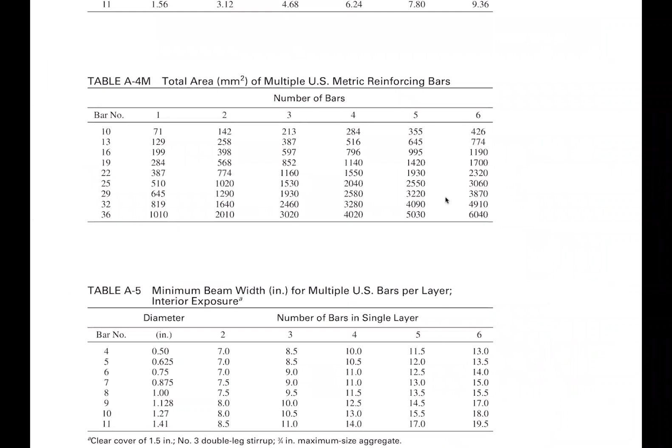Anything? A lot of work, no fun, just work, no play. Well, that sounds like my weekends, right? So that's why we're here.

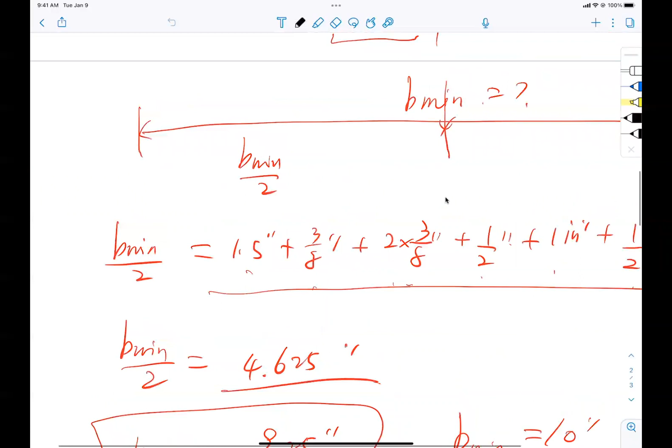What is what we learned here? What is this thing called? Read it out, please. B minimum. What does B minimum mean? Minimum width of the section that allows us to put so many bars in it. So that means if I tell you I am going to put so many bars into the section, you need to give me a size or dimension of the section, width of it, that can accommodate that many number of bars. So how do we write that? How do we get it?

We do that by calculating the detailing. We know that the concrete cover is 1.5 inch. So we go from the left side extreme, incrementally increase the spacing all the way to the corner bars, accommodating the clear spacing of 1 inch between the bars, and then add them up including the stirrup size, that gives you the B minimum. So that's everything you need to know about design.

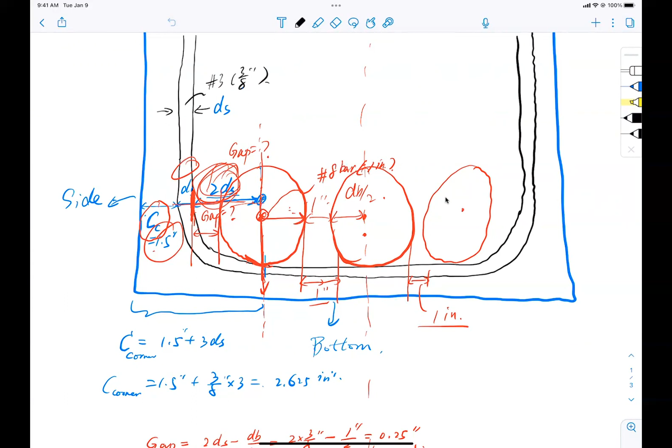But we're not finished yet. This is only one row of bars. Today we're going to look at 2 rows of bars. So bear with me, let's start the game. We have talked about 1 row of bars, it's wonderful. What if I have a section that looks like this, perfect square at the bottom?

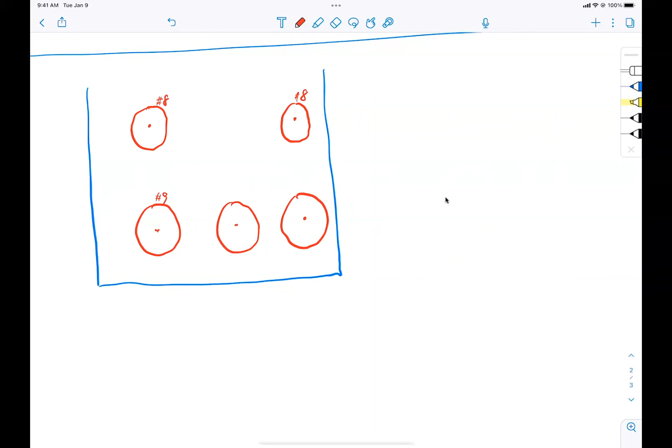And I have bars here, say 3 number 9 bars, 1, 2, 3. And I have 2 number 8 bars. Remember, it's on the side of it, don't put it in the middle. Why is that? Because we need to tie them up to the stirrups next to it. So number 9 at the bottom, number 8 on the top. This is what we have.

And then to put the stirrups here, I need to get this tangential line right up here. This is actually a little bit offset, but let me do this. Here I tangentially intersect, then come up here and do this. My drawing is horrible, but you can get the general idea. So this is the stirrups on the outside of it. Let's say the stirrups are number 3.

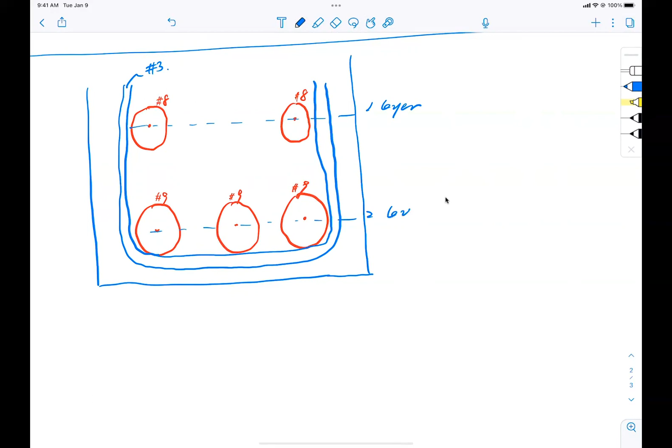Now what is the diameter for number 3 bars? 3/8, right, so 0.375 inch. Great. So now I have one layer of reinforcement right here, and I have a second layer of reinforcement at the bottom here. And if I say that I have a distance between the layers, that is clear spacing has to be 1 inch, you see this a lot. 1 inch is something I use a lot, clear space of 1 inch. The question is, what is the centroid of the group of the bars?

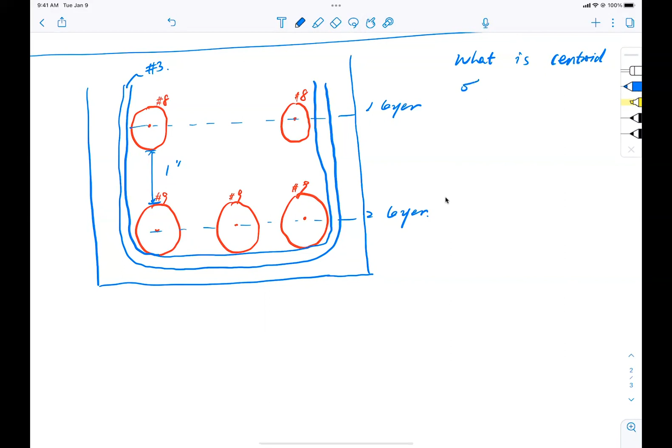What is the centroid of the group of bars? How do we calculate that? There is an equation, remember? What is that equation? Let me give you a hint.

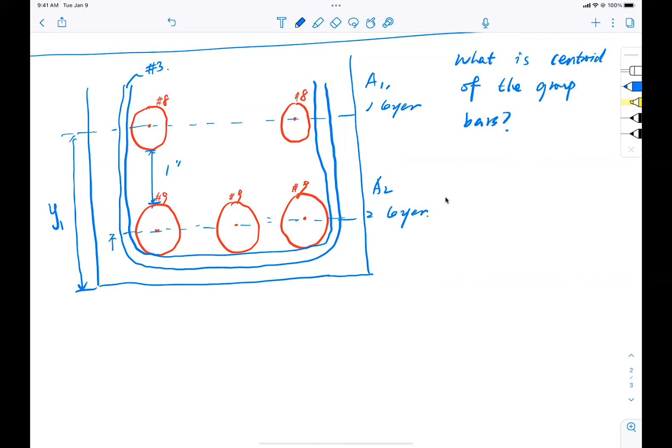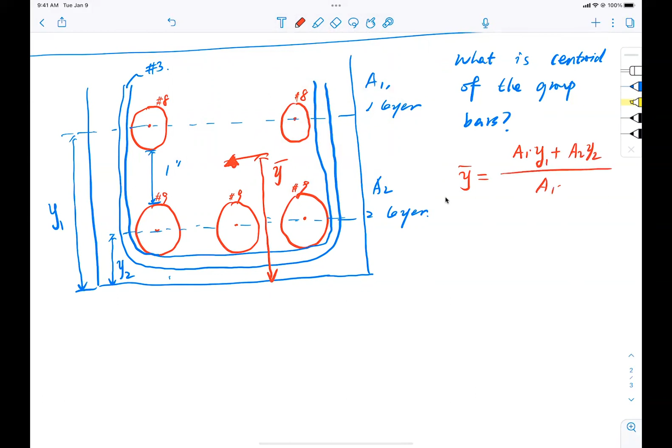So this is A1, and the distance between the centroid of the first row to the bottom line here, let's call it Y1. Now say I have a second row, A2, with distance Y2 from the bottom. What is the distance between the centroid of the group of bars to the bottom surface? Let's call it Y bar. So Y bar equals what? A1, Y1 plus A2, Y2, divided by A1 plus A2. That's very simple, right?

Now, what is the cross-section area for a single number 9 bar? 1 inch squared. What is the cross-section area for a number 8 bar? 0.79 inch squared, close. Okay, 0.79 inch squared. Wonderful. Now you have this information.

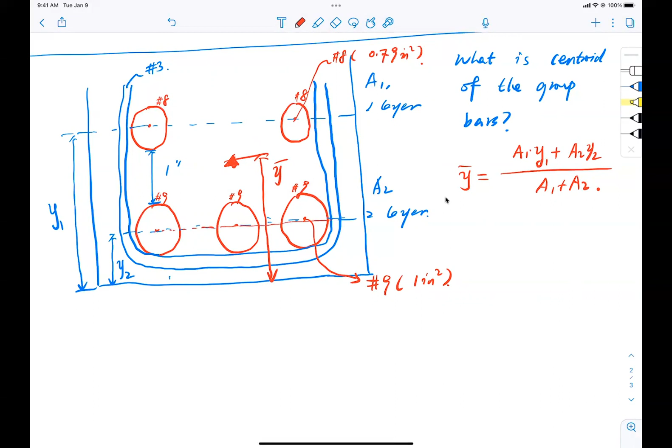Let's assume I have a distance between the centroid of the second row of bars, and that is Y2. Let's say Y2 equals 2.5 inches. And Y1 naturally equals 2.5 inches plus half the diameter of the number 9 bar, which is 9/8, multiplied by half, plus another clear spacing of 1 inch, plus another half of the diameter of the number 8 bar. What is the diameter of number 8 bars? 1 inch, divided by 2 is 0.5.

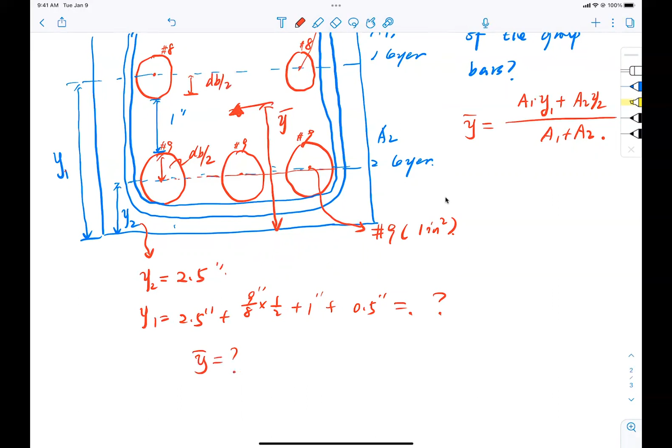Now you have all the information you need. Pull out your calculator, help me out here. Let's see what you get for Y bar. Can you do that? You have the equation, you have the parameters. I'm not going to let you sit there and listen to me yabba yabba on Monday morning. Pull out your calculator, use your brain, let's see what you get. And don't look at my old notes, I have different numbers there, I don't even remember what I have anymore.

New problem today, let's try it. 2 number 8 bars, 0.79 inch squared multiplied by 2, that's roughly 1.58 inch squared. And the distance is 2.5 plus 9/8 multiplied by half, something like that. So get this number.

Let me help you out. Let me do this first by hand while you work on your calculator. So this is 3, 4, so this is 9/16. So 4, 9/16, roughly equal to 4, 8/16 plus 1/16. So that's half, 4.5 plus 1/16. 1/16 is 0.06, something like that, so 4.56 rounded up inches.

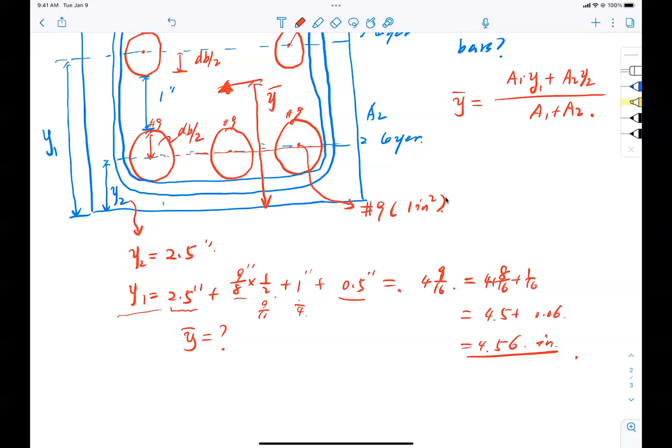No calculator - you guys say somewhere like that? Okay, to be precise, something like that. But anyway...

So that's Y1. You do your calculator, check me by hand. Y bar equals 4.56 inches - that's 2 number 8 bars, 1.58 inch squared, and this is inches plus 2.5 inches multiplied by 3, inches squared, divided by 4.58 inches squared.

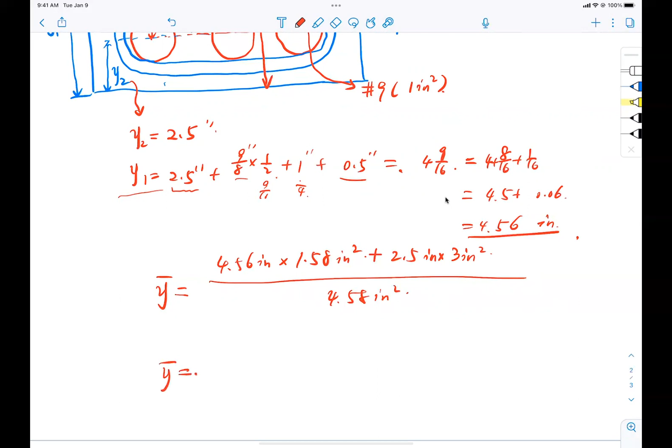What do you guys got? 3.21.

Do I get a second? Okay, so my hand calculation is not too bad, isn't it?

All right, so you got 3.21 inch. What does it mean? Anybody? Well, it means that the centroid of the group of bars to the bottom line here is 3.21 inch. Is that right?

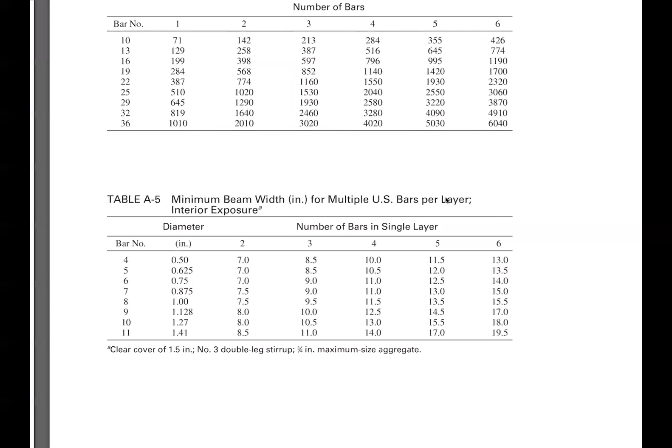Okay, what is the title for that? Read it out for me, please. Minimum beam width for multiple, yes?

Oh, I'm sorry, I had a question about this. Yeah, let's solve your question first. So in the notes, when we calculated DS in the past, it looks the same as when we calculate DT. Yeah, that is only when we have 1 layer of bars. Okay, so DS... Exactly, yeah. Okay, good, no problem.

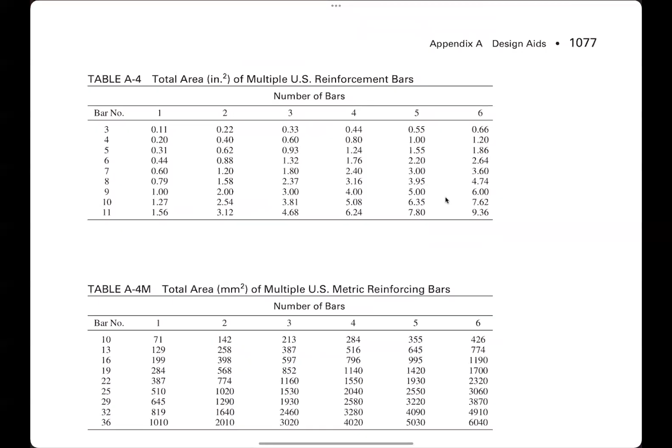Yeah, so let's get back to this. This is table A5, and it's called minimum beam width for multiple US bar per layer. So that means in our situation, I can choose my beam width from this table.

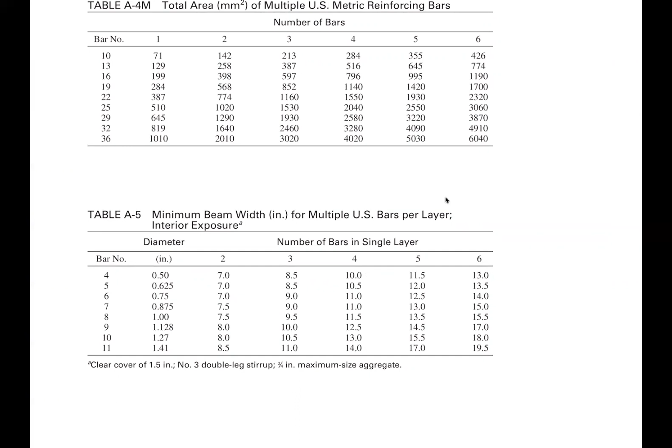Okay, how do I choose that? What kind of situation was I in? How many bars in the one layer? 3, number 9 bars. So I go to number 9, which is right here. Can you see that? Can you read it out for me? Number 9 bars, how many bars do I have there? 3 bars, right? What is the minimum beam width? 10 inch.

Okay, this is not precise, right? It's just a round number, so you can use this table for design. But in the exam, you cannot only use this one. In the exam, you have to do both ways: calculate the exact number and come back, check table A5 to see if you have a similar number or not. But there is a shortcut, there's a shortcut.

I think with this, we're done with this spacing details. Are we okay with this? Are we okay with this? Yeah, like different numbers of bars and different layers affect how close our value is to that.

Well, think of it, right? You have 2 layers of bars in this scenario. If I say these 2 layers, which layer do you think will be the controlling layer? Why? It yields first. And also why? It has more bars as well, right? It needs to accommodate more bars, right?

So, very good question. In a scenario where I have multiple layers of bars, pick the layer that has the most number of bars. Use that layer to dictate your minimum beam width. Okay, clear? Good. All right, so are we okay with this now? Are we happy with this? Any question about it? No? Okay, we'll come back to talk about it.

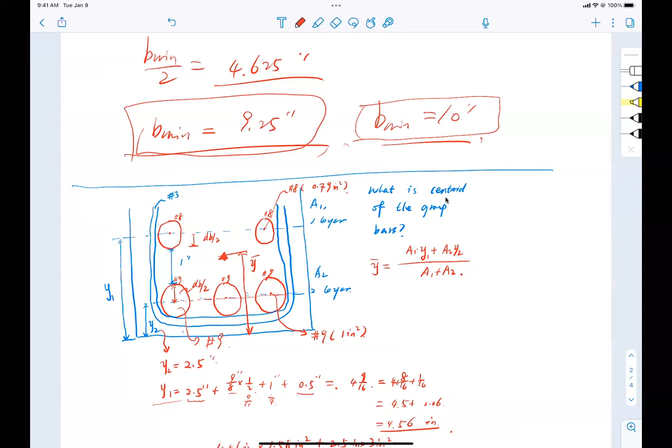All right, so at this point we're done with beam width calculation. Two things you learn, right? What are the beam width calculations? One, we know how deep the bars are relative to the bottom surface of the concrete. We know how to do that with multiple bars. We now also know how much beam width you need to accommodate so many bars in it.

So now we are truly ready for design. Okay. So you may ask me, Bob, we did design already, right? Last time we did a computation. We give you a section, tell you what kind of bars you need to use, and you ask me how to calculate it, right?

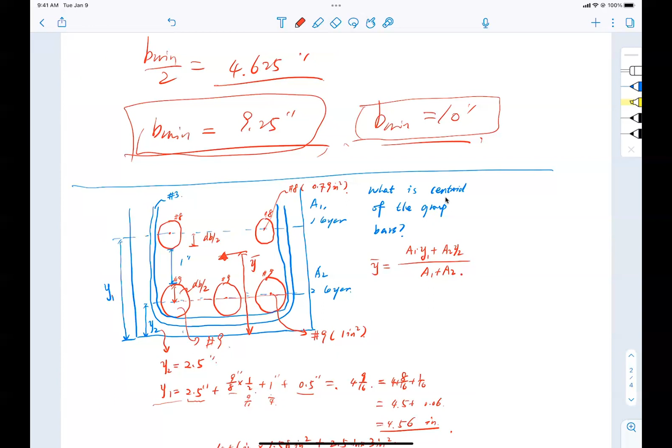Sure, you did, but that was not a formal process. Today we're going to talk about the formal process of doing design. So new lecture, lecture 6. Let's talk about design. Design.

All right, so lecture 6, design, be careful here. First thing, design for a singly reinforced section. This is design part 1.

Let's take something very easy. This is only unknown reinforcement, but known section size. That means I'll tell you the section size. For example, I have a section like this, and I give you a width of it. So let's say B equals 12 inch. And then I have a height of it, H equals 24 inch.

And I'll ask you, what is my reinforcement needed? This is so-called design for unknown reinforcement. So how do you start? Or rather, is this question complete? Can you start with this information only? Can you just start design right now?

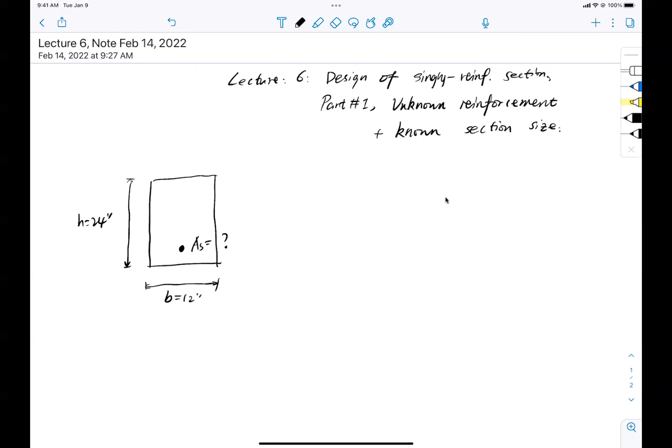Can you start right now? It's like you're a contractor, you go out there on the job site, I give you a $1 million building, build me a house. They say hell no, I'm not gonna sign for that. What do we need? Say it again. Concrete type. So F prime C, say for example in KSI. What else?

You don't ask, I don't tell. Then you're in trouble. Ask me, what do you need? Strength requirement, what is that? MU or N? Think again. MU, factored moment. Close, very good. Factor moment. All right, I'll tell you that, but wait a minute.

What else do I need? You're designing it, you're building it, you're building the project. What do you need? We got concrete, right? What else? This is reinforced concrete design. You got concrete, what else? Steel, right? What do you need for steel? Grade, right? Grade 60, there you go.

What else do you need? What else do you need? And that is all, this is pretty much it. So you see, you need this information to start your design.

All right, now what about MU? How do we determine MU? Let me tell you how. So I am putting this beam in a simply supported fashion on a MODOT I-94 bridge nearby Winsburg. I'm telling you that I have a dead load on top of it, and I have a live load on top of it. So, MU equals what?

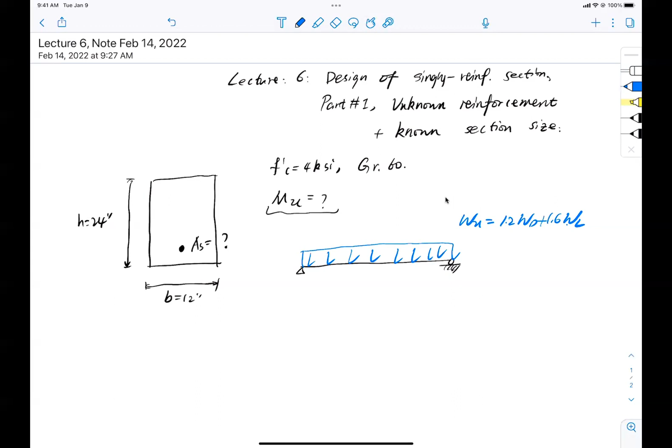I say look, you guys are pretty smart, I'm not going to play games about it, I'm just going to tell you. The moment diagram looks like a parabola, right? And the maximum moment is at the middle of it, right? Let's just say the span length of the beam is L.

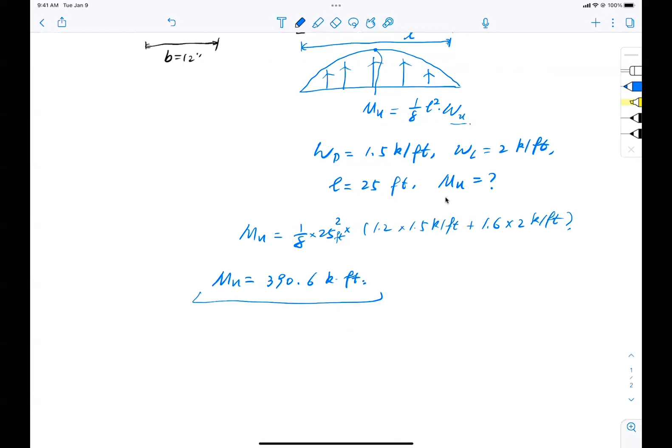You also good, okay. So say this is what we get, right? This is what we get. Okay, now with this I'm going to ask you to design the section for it. So where do we start?

You have Mu now, right? So I'm going to start my design process. Design. And how do I design it? How do I start? Calculate phi, right? How do I calculate phi?

From where? Phi Mn. Phi Mn equal to, I know, phi Mn equal to what? Bigger or smaller than Mu? Sure, before we go there, phi Mn bigger or smaller than Mu? Smaller than Mu?

Oh boy, we're in trouble, right? The design has to exceed the required, right? So phi Mn has to be bigger than Mu. Okay, but should we start with phi? Why do we start with phi?

Say again, we know beta 1. How do we know beta 1? That's right. So beta 1 is what here specifically? 0.85, right? And what else? What else? Anybody? Anyone?

Actually, I would say I don't know where to start. Too many leads, right? It's like a crime scene. Too many suspects. I have phi, I have Mn, I have beta 1, I have A, I have B, I have everything, right? Where do we start? Okay, where do we start?

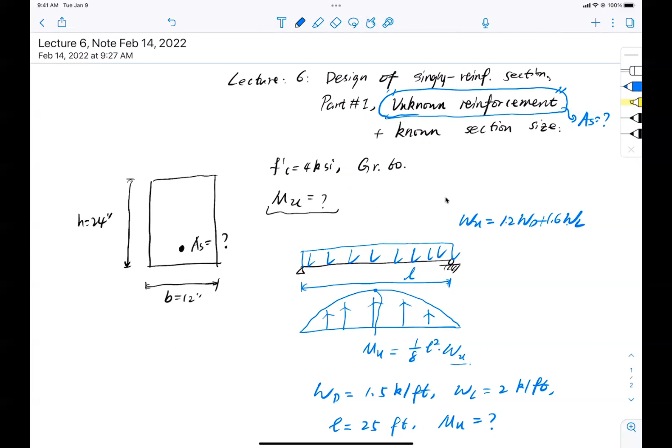Because what is the equation for Mn? Remember, Mn equal to what? T, tension, right? What is tension? As, what, Fy, yes. And then bracket inside, ds minus what? A over 2.

Remember this equation, right? What did we say about ds? For one layer of bars assumed, one layer of bars, what is ds? H minus concrete cover. What is the concrete cover here? 2.5 inch. So we know, isn't it? We know, isn't it, right?

So now what is unknown here? That is what? That is what? A is unknown here, is that right? A is unknown here. So I look at this equation and I say, look, how about let's just assume the A. Can I do that?

First, go find out how much reinforcement area I have. I have reinforcement area, I have total tension. I go back to balance the compression, then confirm A. So I start from A, and it resolves back to A. So that is my thought process, that's how I start.

Okay, with this I can now finally start. Let's keep a bracket here for this digression and thought. Okay, let's start doing it. From this equation, AS times Fy times ds minus half A, that equals Mn, and that multiplied by phi has to be greater than or equal to Mu. So AS has to be greater than or equal to Mu divided by phi Fy ds minus half A. That's how I'm going to start.

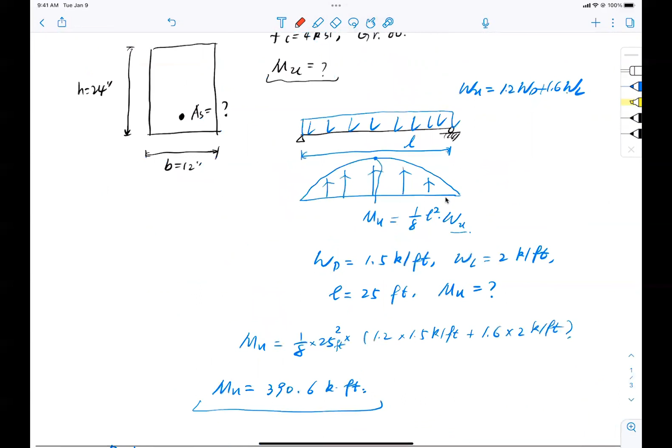So with that assumption, let's just assume this is 0.9 multiplied by ds. What is ds? H, what is the height of it? What is the height of the section? Somebody remember? 24. 24 minus what? 2.5. There you go, help me out here please. So that is how I'm going to do that.

Can I go straight into calculation right now? I can't, there's a unit mismatch. On top what I have is kips, foot. On the bottom what I have is kips, inch, right? So I need to convert everything back to inch. Multiply by 12 inch per foot to convert it. Now everything's in terms of KSI inch, or kips inch, right?

Now please help me out, do this calculation. What do you end up with? What is this number right here? Come on, do it. You won't find it in the notes, okay? The notes have something totally different. I had it totally different in the notes. Okay, come on, help me out here. 390, it's pretty big.

12 inch per foot, 0.9, 60 KSI, so on, so blah blah. What do you have? 4 point what? 4.49 inch, 4.49 inch squared.

Good, so let's say roughly 4.5 inch squared. So given this number, how many bars? Let's say number 9 bar, okay? I want number 9, simple-minded, pretty simple guy here. Number 9 bars only, how many bars do I need to cover this? 5. What is the beam width here?

B, 12, right? Question: can I fit 5, number 9 bars into this width? Can I do that? I don't know, isn't it? I don't know, I've got to run the detailed calculation, remember? And that's going to take forever, right? So we take the shortcut.

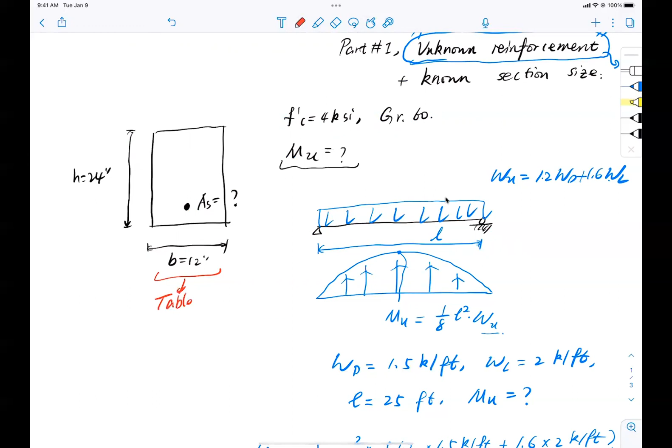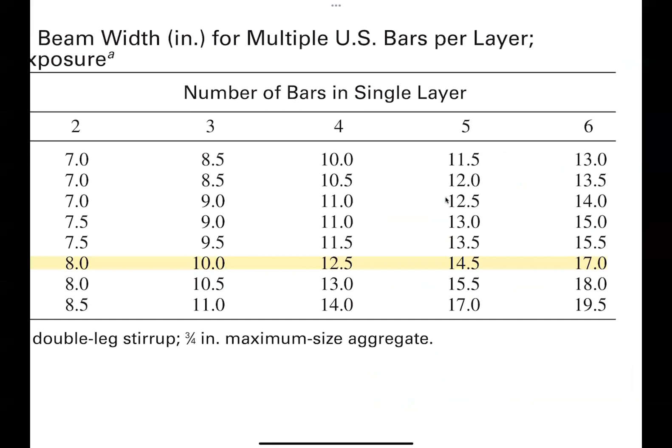What is the shortcut? Table A5. There you go, Table A5. So let's take a look, right? Table A5, so I go back to Table A5. Where is it? Here, and I look, right? Help me out, 5, number 9 bars. What is the minimum beam width?

14.5 inch. What does it mean? Means that I cannot design this section to resist this 391 kip-foot with number 9 bars. I have to either increase my bar size or increase my section, isn't it? I increase my section. So that's a check already. Do you see that?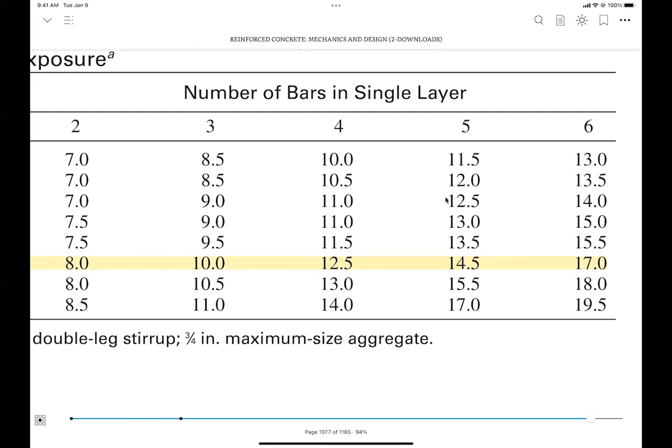Okay, wonderful. All right. But I'm lazy and I want to finish this lecture in reasonable time, okay? So let's keep playing along and reduce the Mu here. I'm not going to design a section for this capacity, too big. Let's play a safer game. Let's say, okay, start all over. And now you can look at old lecture notes, right? Start over. Let's say Mu equal to 145 kip-foot.

Very small number. Why is that? Because I'm lazy. I want to keep using the 12-inch by 24-inch section. I want to keep using number 9 bars. I'll show you later how we can design for a higher capacity, but today let's go with small capacity first.

I just want to show you there's a pre-check. You know right away whether this design will work or not. It takes you only 5 minutes on the job site. You know immediately whether this section size is big enough for your beam or not. Get it? So don't rush into it. Go there, do a quick check, so you know immediately whether this section can work or not.

All right, so apparently it doesn't work. So I'm going to reduce my load and give you an easier problem. I say Mu equal to this much, and let's recompute. So now AS, forget about it, drink your beer and forget about it, right? Say AS equal to 145 kip-foot multiplied by 12 inch per foot, converting to kip-inch, and then come back here.

0.9, 60 KSI, and 0.9, a 21.5 inch of depth. Okay, you run this number. I'm going to speed up since this is repeating. So this has to be 1.67 inch squared. Now you look at this number, 1.67 inch squared.

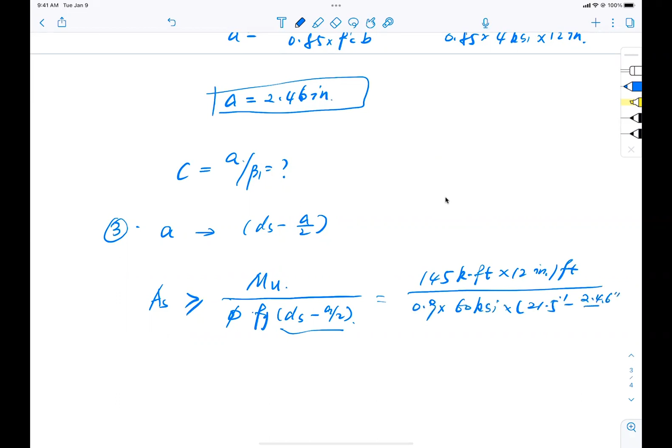So now AS, recalculate my reinforcement, needs to be greater than Mu divided by 0.9, which is phi Fy, and now I know my depth minus half A because A is known. So first step, I need to confirm this. So this is 145 kip-foot multiplied by 12 inch per foot, divided by phi, still 0.9, 60 KSI multiplied by ds, which is 21.5 inch minus A now calculated 2.46 inch divided by 2. And with this, my AS has changed to 1.59 inch squared.

Okay, so what did we do? We guessed the As, used that As to go back and check A, then used that A to go back and check As again. So after iteration 1, we finalize As now. At this point, we say now you can select bars.

So how do we select the bars? 1.59 inch square, right? Can I do this? Sure, you can do that. So I have options now. I can use number 9 bars. Remember number 9 bars, and 2 number 9 bars gives me an As of what? 2 inch squared. That covers that 1.59 inch squared requirement.

But I can also opt for number 8 bars. To do number 8 bars, how many bars do I need? 2 or 3? With 2, I end up with 1.58, just a hair less, right? So I need 3 number 8 bars. So what is the cross-section area for number 8 bars?

0.79 inches. So 3 number 8 bars, how much? 0.79 multiplied by 3, come on, what do you get? 2.37 inch squared. Do I get the same? That is bigger than 1.59 inch squared. So I either go with 2 number 9 or 3 number 8.

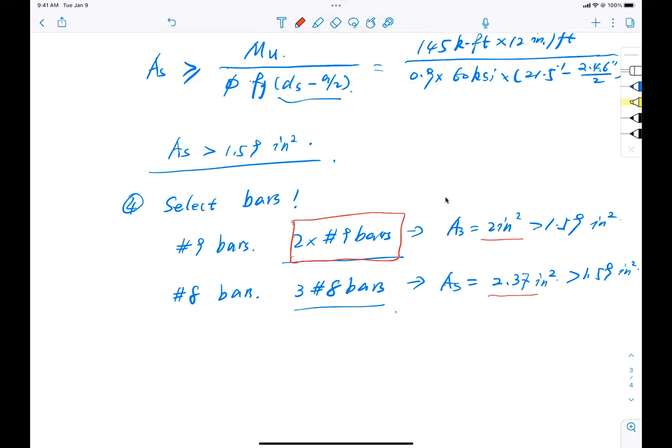And also, just to sweeten the deal, this is 2 inch square versus 2.37 inch square. I get less steel anyway. I use less steel anyway, so going back to material, this is even better. So lock and load, 2 number 9 bars is my option. Okay, I'm going to go with that.

All right, so what to do next? Well, I have a section. It has a width of 12 inch, a height of 24 inch, and a depth of 21.5 inch. And I opt for 2 number 9 bars here at the bottom. And I know that my Mu equals 145 kip-foot. That's what we know right now.

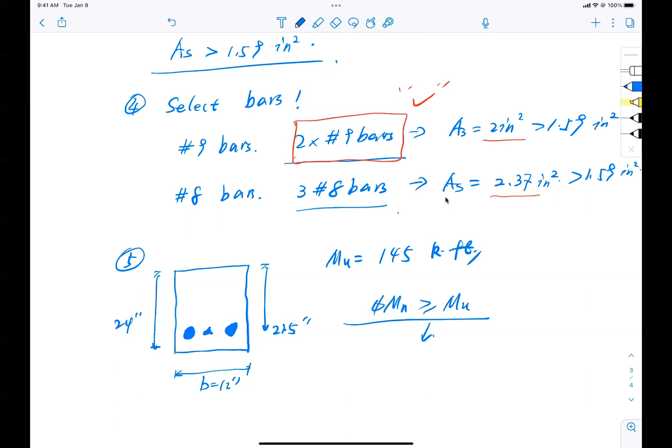So what do I need to know? I need to check that Phi Mn has to be greater than or equal to Mu. So this has just turned into an analysis problem, hasn't it? An analysis problem you have seen, you have completed, and you will be doing homework about. Is that right? We have covered it.

So today, this is our first take-home quiz. Finish the rest of the problem, okay? Quiz number 1. Check this section and show me that Phi Mn is greater than or equal to Mu. Clear?

So what is design for unknown reinforcement? It's all this hoopla, steps 1, 2, 3, 4 that are added on to analysis. Basically, right at the step where you pick bars, once you pick your bars, you go back to analysis.